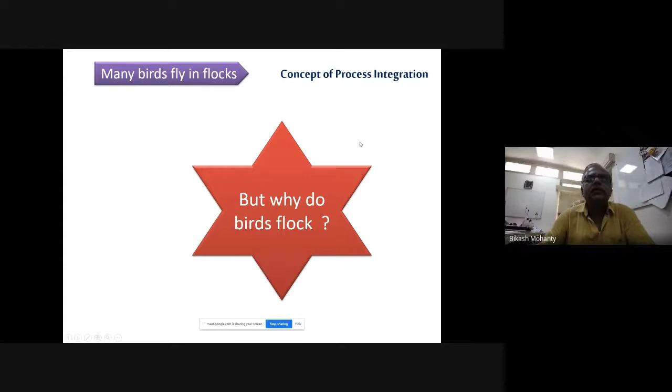Now, the question is why the birds fly in this fashion and why the birds flock together. Why do the birds fly in V formation? There are a number of social factors for this: reproduction, protection from predators, communication, navigation, etc. But for the time being, we are not interested in all these factors; we will try to find out what is the technicality behind this, what is the technical factor.

But let us look only at aerodynamic factors for the time being. One theory is that there is an aerodynamic advantage to flying behind and to the side of another bird to take advantage of its wing tip vortices. Birds fly in a V to help conserve their energy during migration. Because you all know that birds can fly thousands of kilometers for migration. And obviously, they have to find a technique in which they will spend minimum energy during flying.

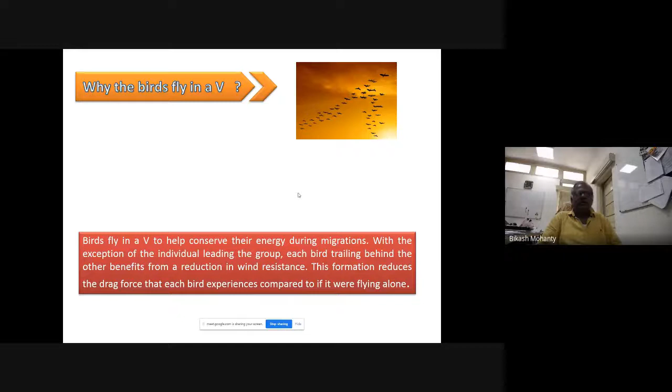With the exception of the individual leading the group, each bird trailing behind the other benefits from a reduction in wind resistance. This formation reduces the drag force that each bird experiences compared to if it were flying alone. You can also experience this if somebody is riding a motorcycle and you are a pillion rider; the person driving the motorcycle will face the maximum resistance, and the one sitting behind will not face that maximum resistance.

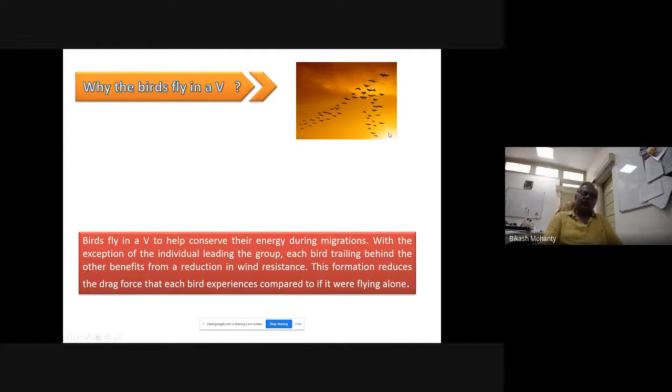So what the birds do: the bird which is leading the group, after some time, will come to a back position, and from the back position one will go to the leading position. This way they change their position during migration. Now if this is true, then the energy required for flying a certain distance per bird decreases.

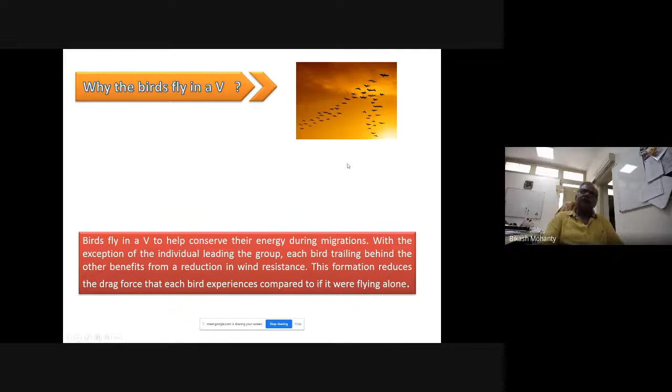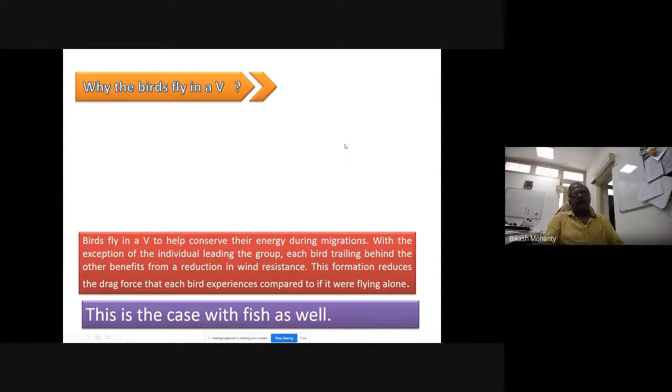Now let us see whether fishes also use the same technique to reduce their energy. This is the case with fish as well. Why do fish swim in schools? They do this mainly because of two simple facts of nature. One, big fish eat little fish, and two, there is safety in numbers. But we are not interested in these two factors. We'll see the technical factors behind this.

The size of the shoal and often the flashing of light reflected off thousands of fish can confuse predators, but being in a school also means that a predator cannot generally eat the lot, and so significant numbers survive. So nature has given them the intelligence to save themselves.

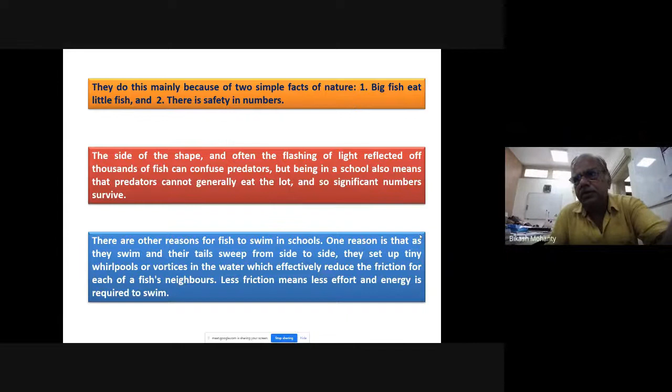There is a lot of sound coming to me. Actually, sir, okay, sir. Yeah, just mute your microphone. So please correct your microphone, it is disturbing my thought process.

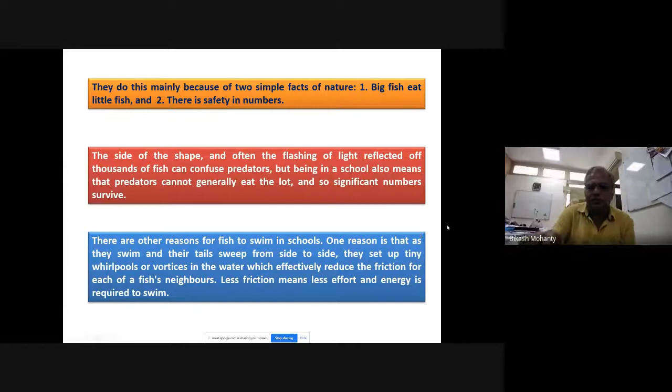There are other reasons for fish to swim in schools. One reason is that as they swim and their tails sweep from side to side, they set up tiny whirlpools or vortices in the water, which effectively reduce the friction for each fish's neighbor. Less friction means less effort and energy is required to swim. So here we also see that birds and fishes use some technique to reduce their energy when they are working in a group.

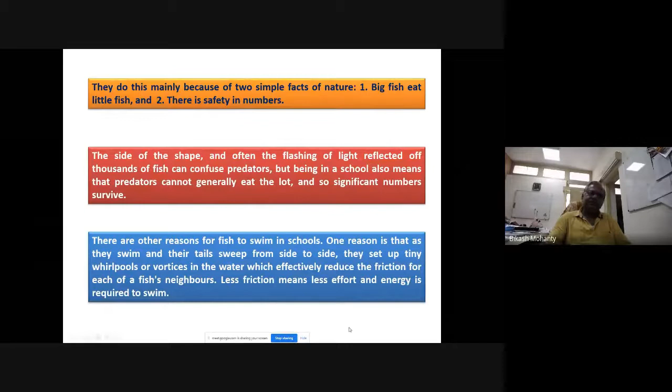So what we saw in the first two slides is that integration helps conserve energy. Maybe after a few years you will find that many aeroplanes are moving close to each other to reduce energy. This is not done now because there are safety reasons, but maybe when our control systems are perfected, they may fly like this to reduce the energy consumed by the planes. Now let us see another example. Tomatoes and potatoes grow on the same plant.

Now potatoes grow underneath the soil and tomatoes grow in the upper part of it. But if I join these two, then I will have a plant which will give me fruit at the top and at the bottom as well. So my harvest will double. So is it possible? The answer is yes.

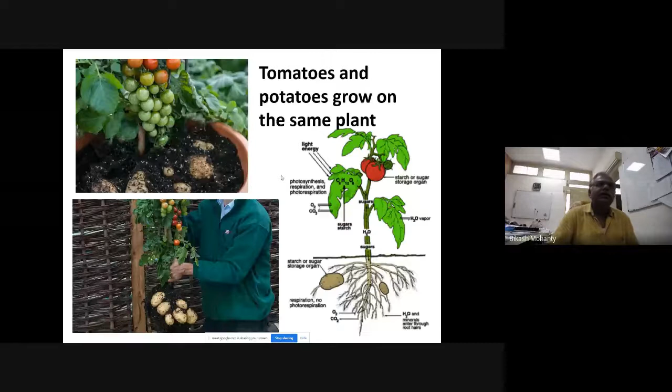So we saw here a plant which gives potato beneath the earth and tomato at the top. So if I do like this, then my production will be double. So integrating a tomato plant with a potato plant is going to benefit me. It is going to increase my product.

The community cooking in Punjab is called Sanja Chulha. If you see Sanja Chulha, the community kitchen, this has been created for many reasons. Here, energy conservation is there. That means the energy used to cook a single chapati for a group of people will be far less than if somebody alone is cooking a chapati.

So, energy consumption is less when we are cooking in a group. If energy consumption is less, then wood consumption will be less. And if wood consumption is less, I'll be saving trees. Plus, when many people gather together, they will talk to each other. They will know each other's problems. A solution will come out in discussion. Plus, their stress level will decrease.

So, the Sanja Chulha is not only decreasing the energy for producing chapati, but it is also solving some social problems. That means in one go, I am solving so many problems. Here also we saw that if we are integrating with each other, then we are saving a lot of energy, plus we are solving a lot of social problems also.

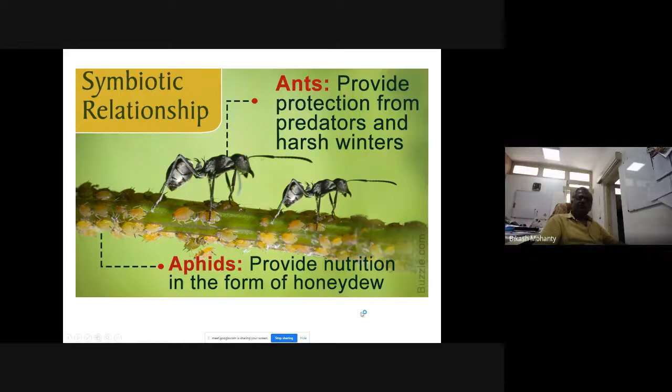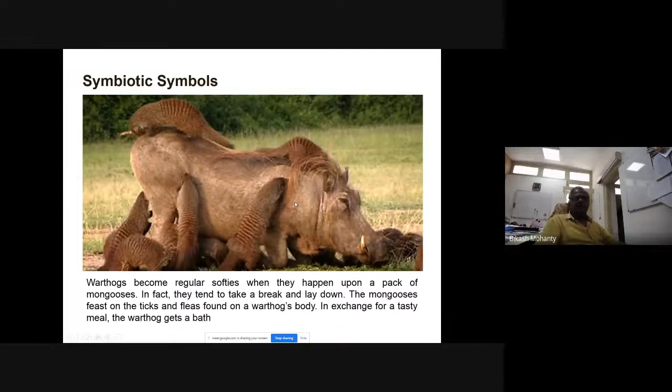Here also you see mongoose eating the parasites on the body, and this is also a symbiotic relationship. So after seeing so many symbiotic relationships, we ask a question. So this is the birth of a new concept which tells: together we all win.

Now the question is, do we have a technology which mimics this concept? This thinking process is there in nature; we saw it in many places. Can I apply this thinking process to a plant and get benefit out of it? The answer is yes. We have a technology which mimics this concept, and this is process integration. In other words, we call it pinch technology.

When I say process integration, this is a thought process, and this thought process is implemented by pinch technology. The thought process can be implemented in many ways, but pinch technology is a way to implement the process integration thought process. Integration is the key to better design and operation. This is our keyword, and we'll see how integration helps in design and operation.

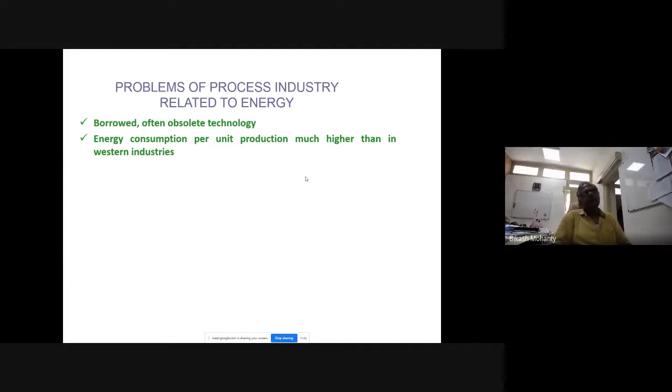Energy consumption per unit production is much higher than in Western industries. How do you know that this technology is obsolete? Because if you compare the energy consumption per unit production of anything, say iron, say a car, a cycle, a motorcycle, then you will find that the energy consumption per unit production in India is much higher than in Western industries. Even food production per unit area of India versus China, if you compare, you will find a large difference. And why is that difference there? Because the technology which we have taken is borrowed and often obsolete technology.

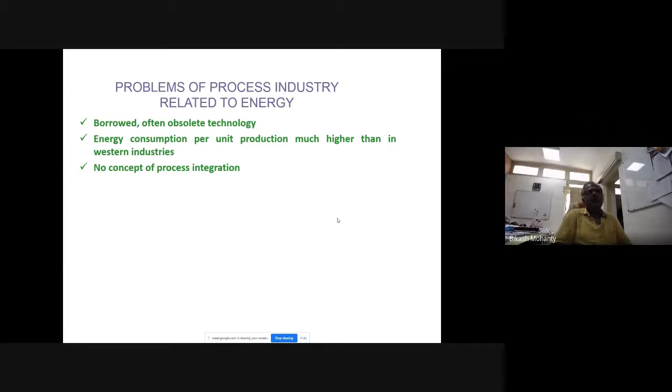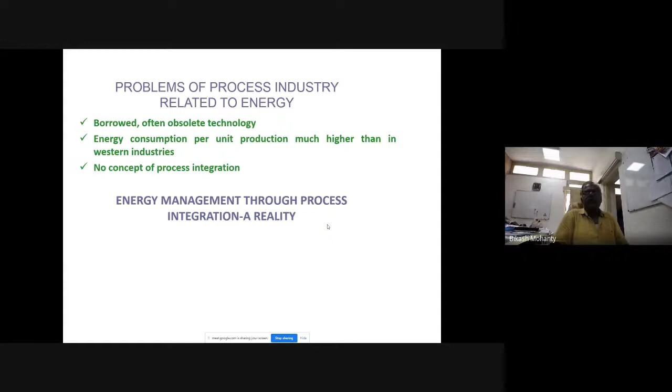Why did all this happen? Because at that time, or even now, there is no concept of process integration. We have not used process integration in our design and operation. That's why our energy consumption is far more. Energy management through process integration is a reality. The concept of process integration is a real concept. That means it can be implemented in industry. It is not a concept in the air. You can directly implement it in the industry, and industry can benefit from it.

Problems of Indian industries can be solved by using techniques that minimize energy consumption with minimum investment. Process integration is one such technique.

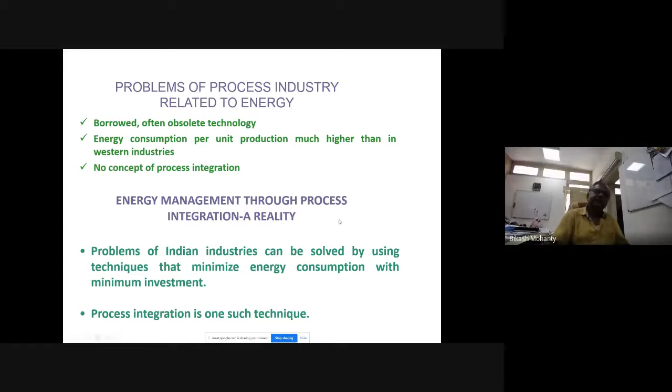Now, when you join a plant, a lot of questions are bombarded on you, because they think that this guy has come from IIT or NIT and he must have better knowledge than us, because our knowledge is 50 years old, 30 years old. So he must be coming with new knowledge, new technology. So he will be able to solve our problem.

But the questions they will bombard on you are: save water, because water has become a very scarce commodity, so don't use this much water. Reduce waste. Minimize wastewater, because the pollution people will catch hold of you if you don't. Increase throughput, because everybody wants his profit to increase, because profit works as a fertilizer to the plant. If you don't give this fertilizer, the plant will not grow. Meet new product specifications, because the world has started demanding new product specifications. Example is petrol.

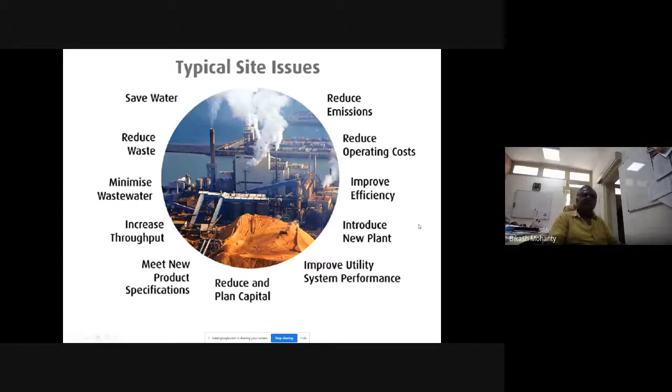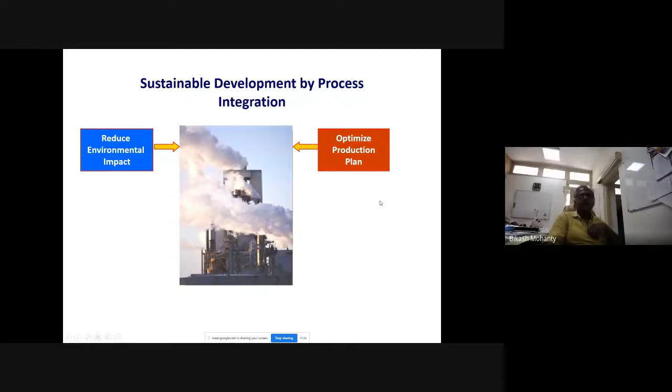Now, another buzzword now is sustainable development. Reduce environmental impact, optimize production plan, improve utility system performance, minimize operating cost. Now, all aspects of debottlenecking, capital cost avoidance, these things have to be applied to the industry to find a sustainable development goal. Because if I use sustainable development technologies, my demands will be solved.

Like, if you are taking energy from, say, coal, it will not last long. But if you take energy from biomass, it is going to exist for all time to come. If you are using solar, for at least a million years or a few thousand years, I don't have to bother if I'm taking energy from the sun. So such sustainable technologies, I should invest a lot in and should develop.

You will be astonished to know that the efficiency of the solar cells we are using, mainly imported from China, is only 13%. Whereas, if you see solar energy research, efficiency up to 40% has been achieved. But the cost of those solar cells is very high, and hence we are not able to use them. So we should start working on the development of sustainable technologies. And government should also give pressure to develop sustainable technologies, which it is giving, I think, and should invest a lot of money on this.

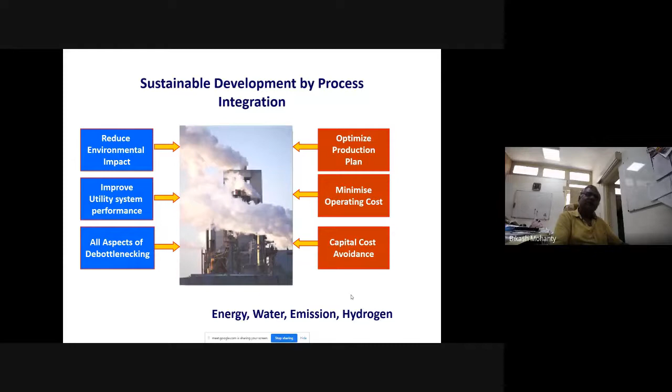Now, process integration is a fairly new term that emerged in the 80s and has been extensively used in the 90s to describe certain system-oriented activities related primarily to process design. Now, when a new thought process comes, it takes time for implementation. It emerged in the 80s, but it took 10 years to be implemented. If you see the curve of a technology's implementation, in the first few years it doesn't take off. This is called the incubation period of the technology. From the 90s, it started taking off.

If I want to define it, process integration is a systematic and general method for designing integrated production systems. Why integrated? Because by integrating, we can save a lot of energy. Ranging from individual processes to total sites, with special emphasis on efficient use of energy and reducing environmental effects. Now this total site concept is something different. Suppose there are 4 steel plants operating in an area. I can apply process integration to single plants, and I can also apply its principles to all 4 steel plants together.

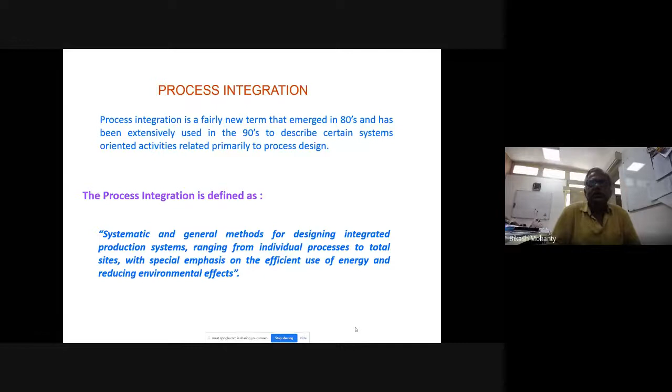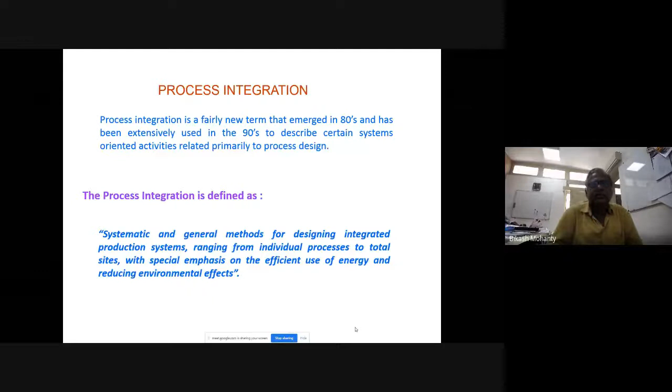They will integrate their food. If they integrate, they satisfy each other. So you do not have to go outside to purchase. Otherwise, what will happen? You will purchase some rice from the market and he will purchase some sabji from the market. Now, when I say market, this is energy you are taking from outside.

The process integration application areas. While heat recovery was the initial focus of process integration, the concept started with heat integration. But the scope is expanding. The scope has been expanded considerably during the late 80s and 90s to cover several aspects of process design. A key feature of this expansion has been the use of the basic concept of heat recovery in other areas through the use of analogies.

Now you'll find that process integration is based on thermodynamics. The thermodynamics first law and second law are extensively used for process integration. And we know that thermodynamics can be applied to almost all disciplines of technology or engineering. If it is so, then process integration, which is based on thermodynamic principles, can be applied to all engineering disciplines.